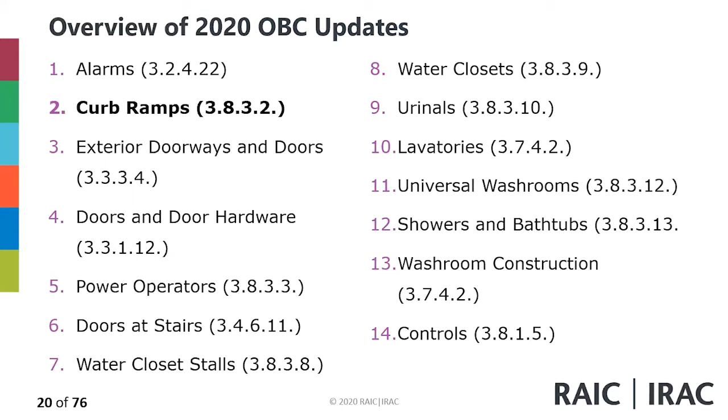Okay, so let's go back to our agenda. We're moving on to item 3 here, facilitating universal design. One of the biggest problems we see in the design industry, and actually systemically throughout our society, is how we think about disability. And one of the biggest limiting factors is a bias about people with disabilities and the way we even think or talk about it.

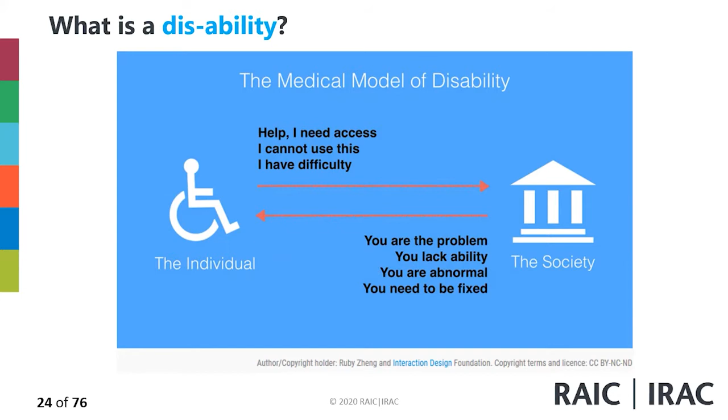So the most common limiting factor is often referred to as the medical model of disability, where we look at the individual as being the problem. So if the person says, as this graphic is showing, help, I need access, I cannot use this, I have difficulty, and society's response has typically been, okay, but you're the problem. You're the exception, you lack the ability, you're abnormal, you need to be fixed. And of course, that's completely backwards and very limiting and very disabling.

Instead, what we're seeing is society moving to what's called the social model of disability, where the individual at any stage of their life, through illness, accident, or aging, might have a change in their needs. So help, I need access, I cannot use this, I have difficulty. Instead, by society is met with, right, we'll remove the attitudinal barriers, the environmental barriers, and provide multiple solutions for you and everyone. So much more welcoming and accommodating, and a smarter, sustainable design.

Principle 2 is thinking about how is the flexibility in use? So for example, all you left-handed people out there know how right-hand biased the world is. How could we be making things that are left and right-hand friendly? Principle 3 is about simple and intuitive use. Principle 4 is perceptible information. Principle 5 is tolerance for error. Principle 6 is low physical effort. And principle 7 is size and space for approach and use.

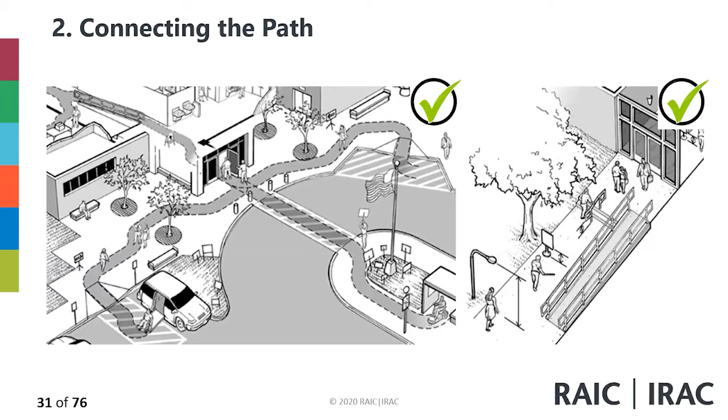Now, also thinking about path of travel, if we think about the parking access aisle, as we saw in the picture above, we see a user with a power chair coming out of a side entrance with a drop-down ramp from their modified van, and they're coming into the access aisle. Well, one of the issues with the access aisle is that the minimum allowed by code or required by the AODA is not technically wide enough for most people to be able to get off their ramp and have the turning space at the bottom of the ramp.

Most people in most situations, unfortunately, have not been designing thinking about how to keep people safe, particularly seated people or shorter people who are harder for parked cars to see. In this case, they wouldn't have a sidewalk to get to, so they would be having to use the driveway. And this is where we see, unfortunately, far too many accidents. So again, plan it. Where does it need to be? And if it can't be immediately against the building, then you have to provide a sidewalk to access it.

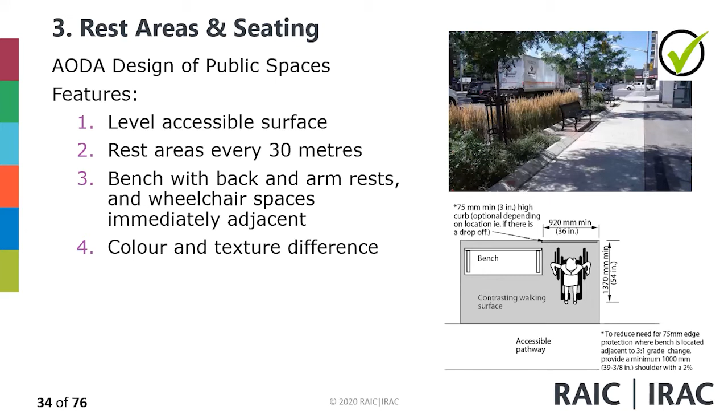And then providing a color and texture difference on the surface underneath and between the bench itself and the surroundings helps people to find it, particularly if they have vision loss issues.

Stairs themselves, again, is a part of the AODA design of public spaces and in many other municipal standards. And what we see here is if you have exterior stairs, you have to have warning surfaces at the top of the stairs or an entry point to the stairs. You need to have continuous handrails around the landings unless there's a door. You need to have extensions on those handrails on both sides.

I know the building code doesn't say you have to have it, but if you don't have a choice, if you're using the left or the right hand side, for example, if you're an amputee or had a stroke, you need to have those extensions, and particularly extensions are important for people who have low vision or who are blind. The tactile attention indicators, as mentioned, need to be at the top or any entry point on the landings, and there are requirements for the position of that.

The color contrasting of the nosings has to be at the top of the nosing. It has to wrap down around the face of the nosing so that you can carefully and consistently see the edge of that stair. And then lighting levels, obviously, and signage. So if you're moving throughout your site, you must have proper stairs provided.

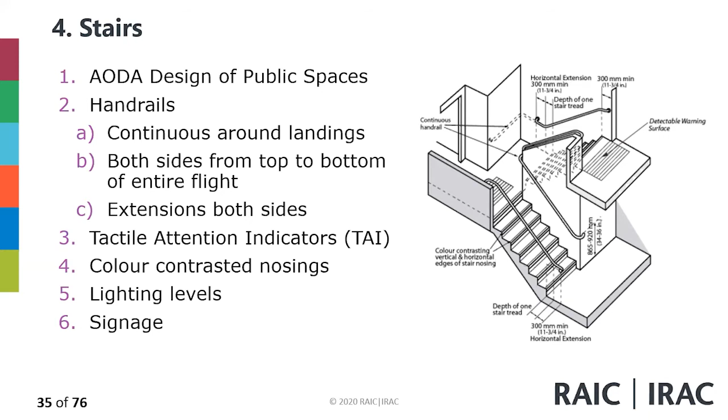But having said that, the AODA also requires every single path in your site plan also has to be accessible. So no longer can we have, well, this is not an accessible path. If you have a path that has some stairs, you probably can only really fit in a few stairs because you're also going to need to have a ramp. So as mentioned earlier, you can have stairs and ramps together or ramps only at a low slope.

You want to make sure you're thinking about the locations. You want to make sure you've got the slope correct and the color contrast to differentiate the level areas of the landings and the slope itself. The best designs I've seen is where the ramps are entirely color contrasted.

The size of the landings, the handrails on both sides. You want the handrails to be continuous. They have to be at the top and bottom, have extensions on both sides and be color contrasted. And of course, just like with stairs, make sure they have the proper lighting level and signage.

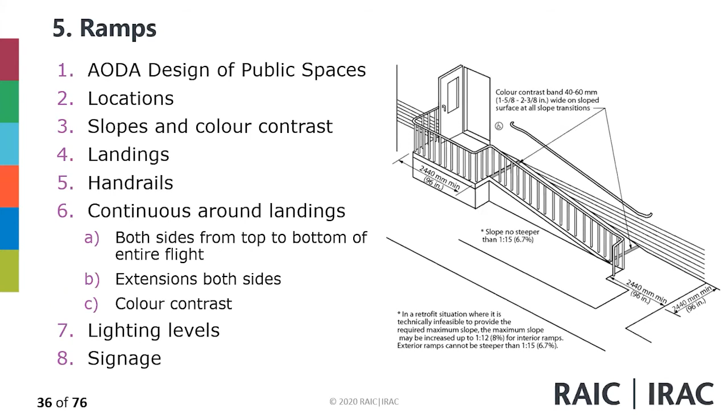One of the biggest problems we see when we're using pavers, or as this picture shows here, bricks for exterior surfaces, is the frost heave effect. In fact, many of the projects we've worked on, within 2 to 3 years, we go back to the site and find, unfortunately, it wasn't installed properly. So do you have a frost slab? Do you have the proper base for this?

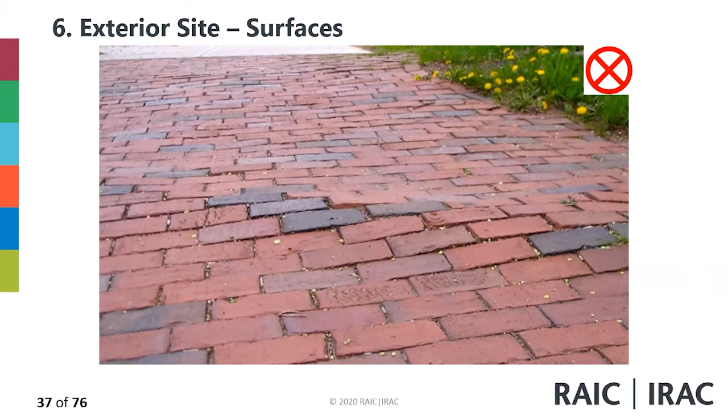Perhaps this is even an argument for having heated sidewalks so that you don't have this type of upheaval, because of course this surface, with rumpled, huge gaps and lifts in the pavers, is no longer accessible and has to be replaced and fixed, which is very expensive.

We also see a lot of people starting to get into trying to use turf as a part of their accessibility strategy. That would be done better if we were using some sort of reinforcement mesh underneath the grass. And we're often seeing the reinforcement mesh being used if there's parking that's happening occasionally onto the grass. But if you're including your grass as a part of your assembly areas, then reinforcing mesh would help to make it more accessible and inclusive than if it wasn't there. So certainly something most designers are interested to hear about, but haven't thought about for themselves.

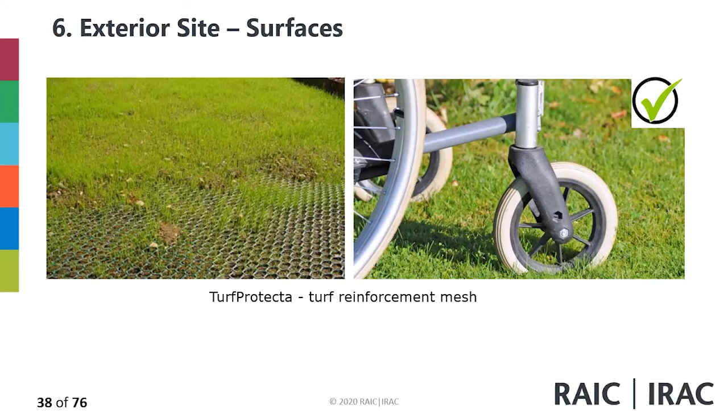And then of course, as we typically mention when we're talking about accessibility, it's one thing to be planning for designing for the best perfect conditions, but the reality in our Canadian environments is that we have winter conditions and less than ideal conditions. How are we planning for those worst conditions where sidewalks are not cleared, curb cuts get blocked by snow from the street plows? So how do you get access to that? Well, in the picture on the left, we can see somebody who's been forced off the sidewalk because it's not cleared and is now traveling on the road, which is obviously not safe.

The picture on the right is from the University of Michigan, that actually, as a part of their sustainability plan, realized that they can use the waste heat from the building and their solar generators to heat their sidewalks and paving to create a salt-free, so again, less maintenance. It's cleared when it's needed, so you don't have to worry about whether your maintenance staff is on site at the right time. And you can see that they were replacing their entire infrastructure piece by piece by using heated sidewalk tubes.

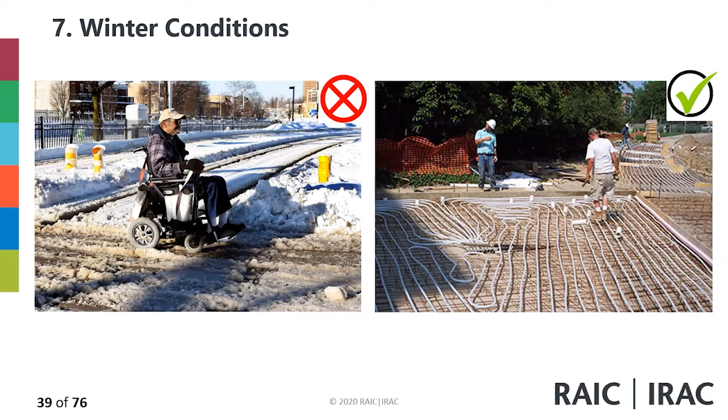Now, the exterior site, you're often intersecting with the city. So sometimes that's your jurisdiction and sometimes it's the city jurisdiction. The most important thing to be thinking about here is making sure you have the slope correct, you have the side slopes correct, that you have the tactile attention indicator at the bottom of the slope, but far enough back to give people a warning they're about to leave the pedestrian area. The use of color contrast, and probably most importantly, that the curb cuts are directional themselves so that people who are blind are not wandering out into traffic by mistake.

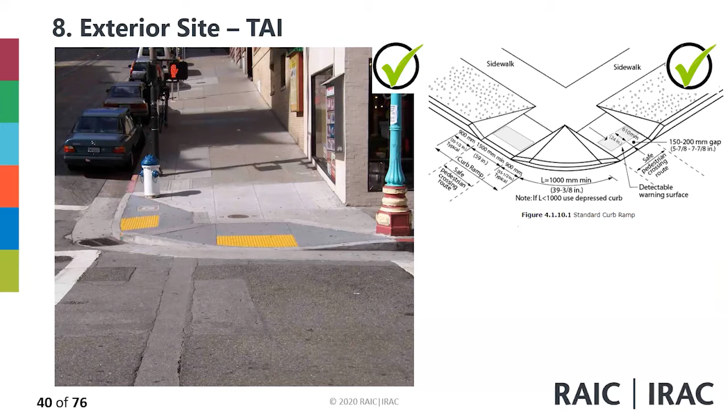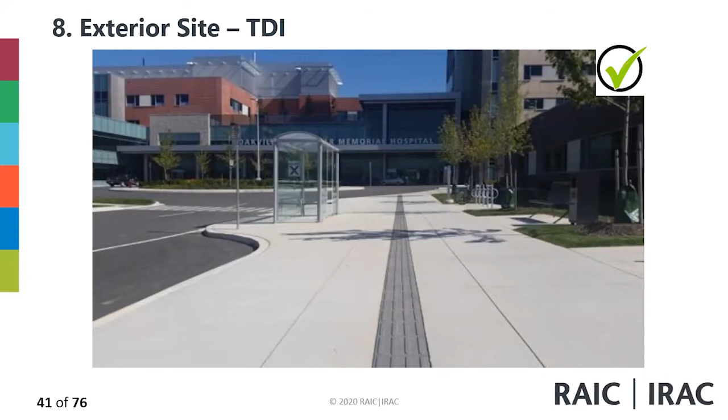The other thing that we can use, particularly in large sites, is to help people from a drop-off area, or for example here, a bus stop, by providing something called a tactile directional indicator tile that can lead people to the accessible entrance of the building itself. So here we see a light gray sidewalk with a dark gray tile. The long bars are an international standard that help people follow them to a particular location.

Here's an example in an American university, helping people navigate independently through a large, complex campus with tactile maps and helping people to find them. The tactile attention indicators, or the domes here, again, are an international standard to help people who are following the tactile directional indicators realize that this is a decision-making point.

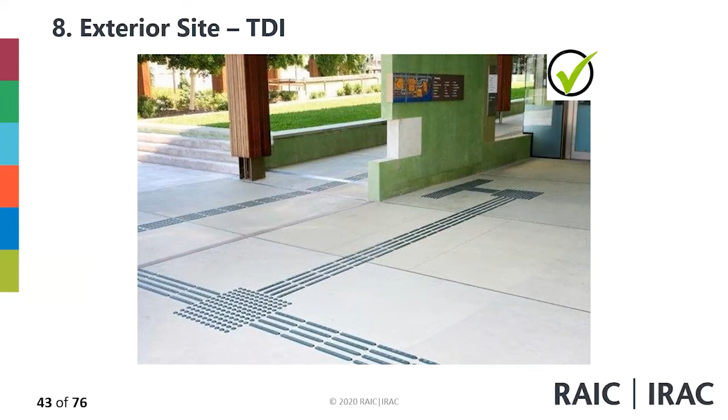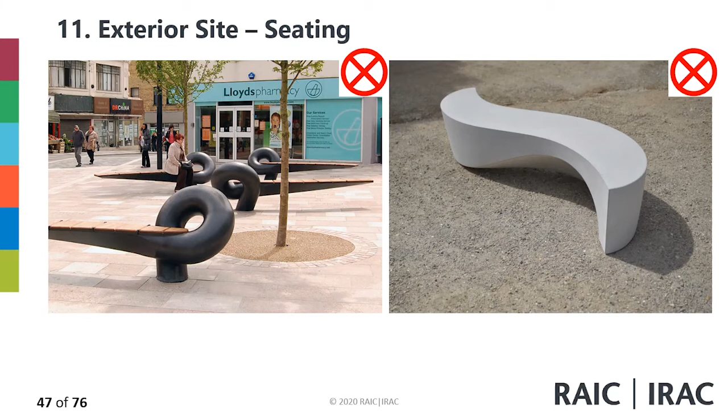And the problem with both of these seats is that they don't have backrests or armrests. And particularly for an older population or people with many different types of disabilities, the stability of having a backrest is really important. And the armrest is important for helping to get up and get down. So here we see a couple of better options for seating. The one on the left is probably the most traditional. It's got really good color contrast and it has armrests on both sides. This is a pretty good example. It's got most of what you need.

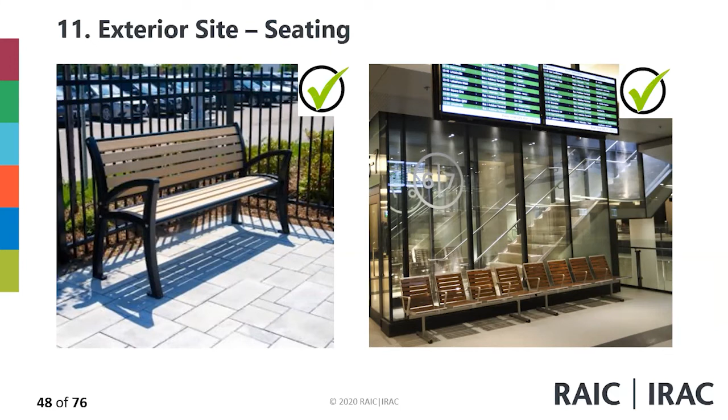But what we see on the right-hand side is individual seats that have armrests between each seat. But the last seat, and hopefully we'll see this a little better in an upcoming picture, doesn't have an armrest on one side. This is called transfer seating, which allows people who are sitting in their mobility device to be able to get out of their mobility device and sit next to themselves, which helps relieve pressure points and give a bit of relief. So here's a better close-up vision of that type of transfer seating.

Often what we're seeing in more progressive designs is the armrests are maybe designed thinking about how could you slip your feet through that. The transfer seat on the right-hand side would be kept, but the armrests between the seats in the middle would be removed, and then we'd only have the armrest on the far left. This would allow for wider and heavier people, or people who need to sit more closely with perhaps their children, or, as I said, for someone to be able to lay down if that's appropriate. So again, your clients' needs are often driving these decisions, but there are things to be thinking about here, so important.

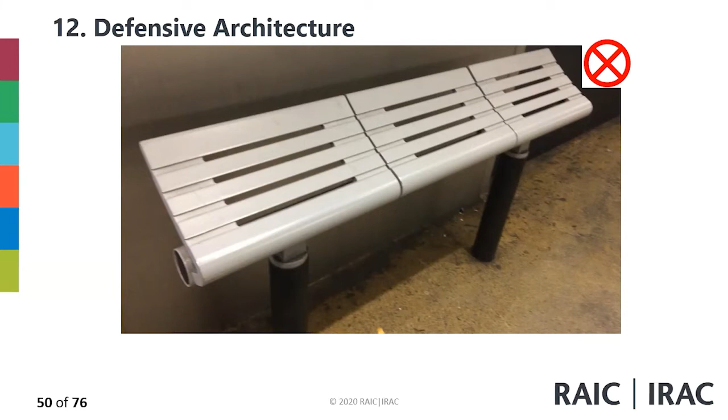And again, when you're thinking about biking, too many people are thinking about the athlete in their bike suit. But people with disabilities bike too. People who can walk short distances can use hand pedal bikes. There's all different types of bike options out there. It's not something we're familiar with looking at, so often we're not planning for it. So again, from a universal design perspective, or from that social model of accessibility, we could be including more people.

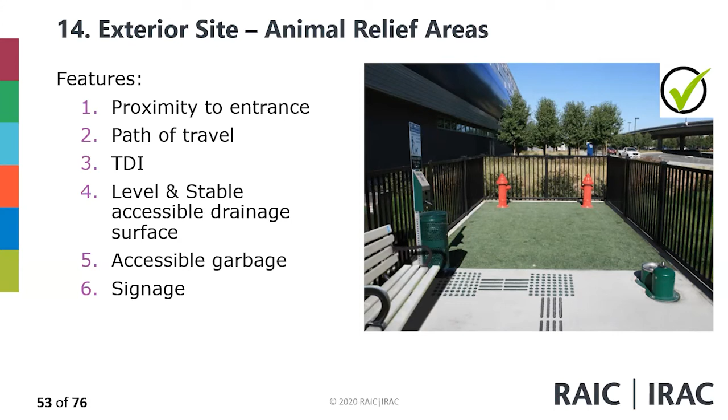And then playgrounds. Unfortunately, the AODA or most of the other accessibility requirements and legislation really don't have any specific requirements for playgrounds. So I just wanted to give you a couple of great ideas, because a lot of people think about the ramps to the play areas. That's pretty typically well covered. But if you thought about the ground level play that people could have, putting in a canoe is a great way to do it, but cutting out the side of the canoe means people with mobility devices or who can't climb over the edges can play too. My son liked playing in these areas because he could run around really quickly and not get stopped by barriers. So it was harder for his friends to catch him when they were playing tag.

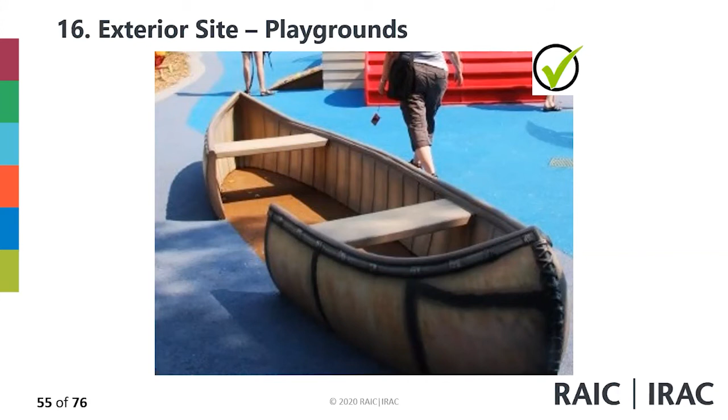And then this type of thing, which is great for both a water feature or for sand features. I know parents hate those sand pits because the kids just come back with sand everywhere. But if your kids want to play with you, maybe bending down to play in the sand is not very comfortable, or maybe doesn't feel very sanitary. So providing raised tables for water play or for sand allows people with mobility devices to wheel right up and play right alongside and not feel segregated or marginalized or forgotten.

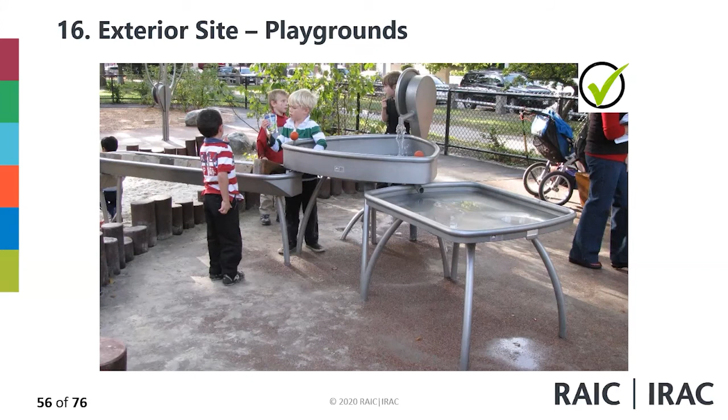And allows parents with bad backs or grandparents to play with their kids. So much more of a community idea.

And then, of course, talking about communities, we're starting to see a lot more about community gardens. And one of the great things about having a raised community garden is, again, if you can't bend down or if you're in a seated position, you can still touch and smell and participate and plant. And this is particularly great for kids; it often gets people much more interested in the foliage around them.

And then we also see intensive green roofs being used. And this is great for accessibility in many different types of sites, particularly in urban landscapes that are tight for green space at grade, to provide some exterior space, and particularly for different types of disabilities. If you have difficulty with memory loss and for different conditions like Alzheimer's, this is an area that perhaps is enclosed enough that you could be provided with some independent time to be out in the world and not worry about getting lost.

It also provides us with access to places to eat outside, get access to fresh air, and obviously it's a way to beautify our sites in a way that we might not be able to at grade. We're also seeing intensive green roofs as a part of the food culture, the 100-mile diet or the 100-kilometer diet. You know, we're seeing schools and hospitals and universities growing food up on their roofs.

So how can we be making these spaces more accessible by thinking about the path of travel, by thinking about the surface, by thinking about the planters themselves, so that people of any age and any ability can be involved with the growth of that food.

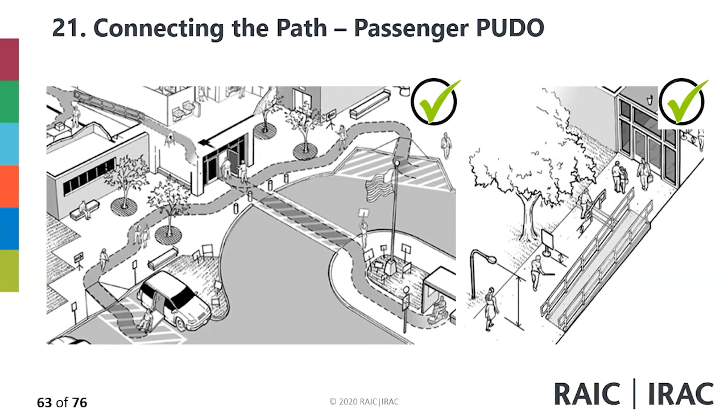But if you were blind, imagine the travesty of potentially walking out of this sidewalk and into the busy road next to it. And as we were talking about before, if we're trying to connect the dots from the drop-off area to the entrance, how are we designing this properly?

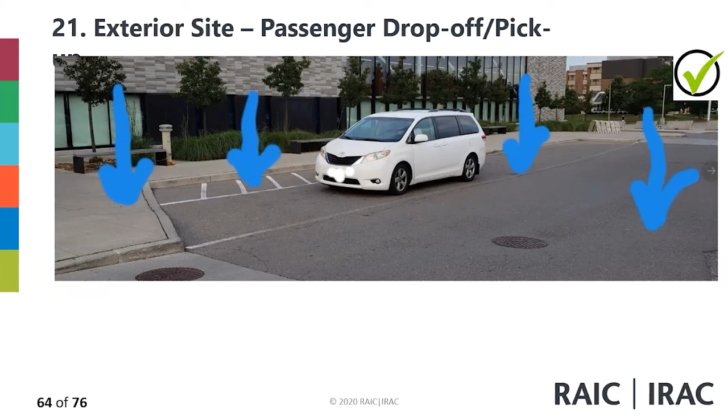And then beside the car, the third arrow working from right to left, or the second arrow from the left, is pointing out the access aisle that's required at the same level as the driveway itself. And then the last arrow on the left-hand side is showing the curb cut that the access aisle leads to so that people can get up onto the sidewalk heading towards the front entrance. So this is a pretty good design, including most of the elements that you would still like to be seeing and are often forgotten.

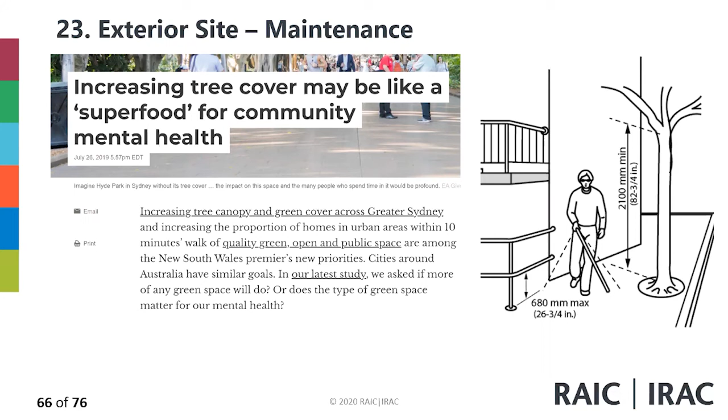Again, maintenance is required under the AODA, and a part of that is snow clearing. It's a part of making sure your trees are trimmed, so you're not creating overheight hazards, that your bushes are trimmed so that you have the clear width for travel. Making sure that you have this done correctly is a really important thing, especially if you're going to start focusing on community mental health, which encourages a lot of plants.

If you're using the ramp, there may not be an edge to help you from falling off one of the stairs or having one of your wheels fall off the stairs and causing a tipping hazard. The ramp is generally too steep or too long. The ramp should never be more than 2 meters of height difference. If you're using a ramp on a site, it should never be more than 2 meters, and that's an international standard. Unfortunately, our legislation doesn't specify that.

And if you're using the stairs, you're going in opposite directions to the people who are using the ramps. So you have conflict in the user directions of path of travel. And if you're using the stairs or the ramps, you have very little access to the support of handrails. So bad design, don't do this.

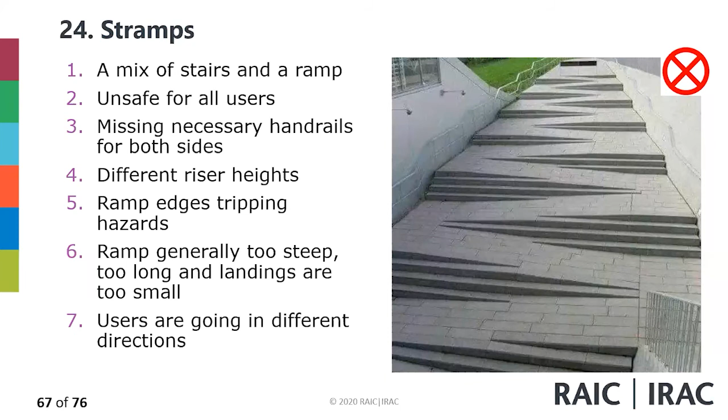But if your friends are hanging out in the middle, how would you be able to get to them if you couldn't climb those stairs? They're very difficult to navigate for people who are blind as well. So very cool. A lot of people thought they were really cool, but actually when you think about it, actually a barrier to too many people and discriminatory.

And that might feel like it's a bit of a conflict with our sustainable goals. But if you think about the safety of the users on the site, there are definitely ways to be doing this to avoid glare, to avoid light shining in your eyes, but still get the light where you need it down the ground.